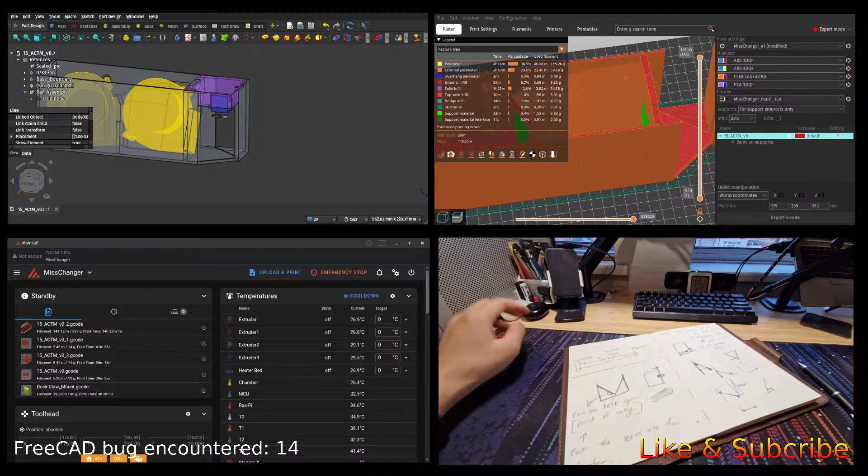Nonetheless, let me plug this in here. Let's see if this thing is gonna change the game in terms of the audio. Is it working? I think it's working, right? Yeah. All right. Ooh, hello. Drop frame coming in.

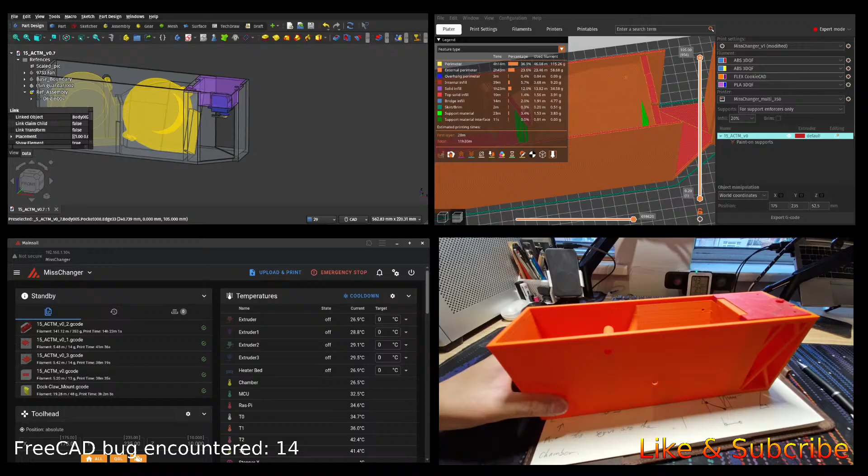Let's recap really quick what we did yesterday. So, what we made here yesterday was an updated version of this thing here. And this is a kit that I built for my Voron 3D printer. Now, it looked great with a bit of stringing here, but the one thing that I pick out of this is definitely I had used too much filament. Too much material is being used to make up this wall and the base.

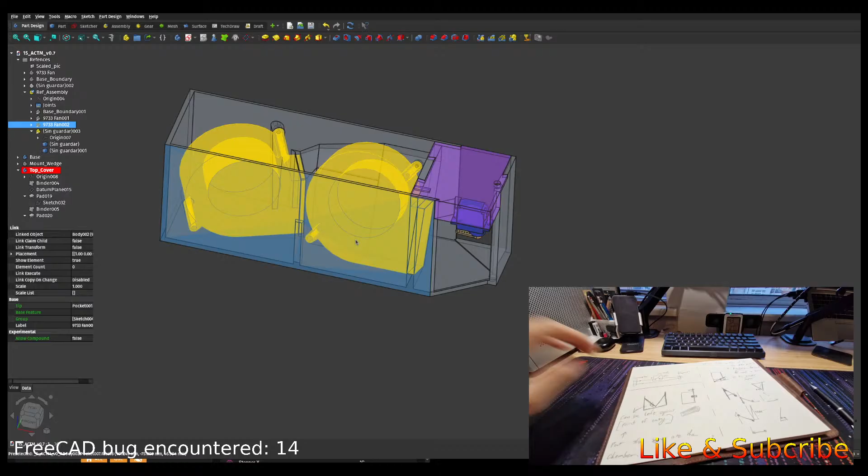So what I decided to do in this new version of the CAD is to reduce the size of the wall and actually make this giant cutout as well to make room for a servo motor to sit there. However, since yesterday I had a bit of second thought, you may call it, on the thickness of these walls still, as well as the existence of this servo motor.

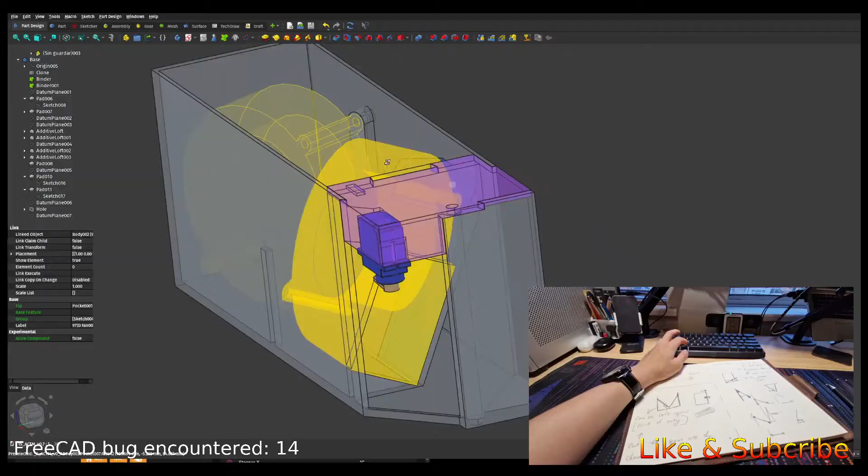So first and foremost, it's not the wall on the side here that I'm gonna be changing today. I'm gonna change the thickness of this 3mm wall in the center. So originally the idea behind that one was that it's meant to mount the fan. It was meant to hold the fan in place. And well, it felt like a good idea at the time. But now I realize if I were to screw in from this side here, there's a pillar right there.

Yeah, hey Dukin, how you doing? Yes, don't get used to a Tuesday stream. I'm literally doing this because I just found a way to stream on Twitch as well, and I go like, oh, I can do that, and here I am, testing it out. Taking it for a spin for a couple hours.

Anyway, yeah. So now this thing exists now, this screw-on bit. So if we put on the view, oh my god, it doesn't show it. Flip it. There we go. Didn't change anything. Oh, no. Transparency. Sorry, that was the wrong button.

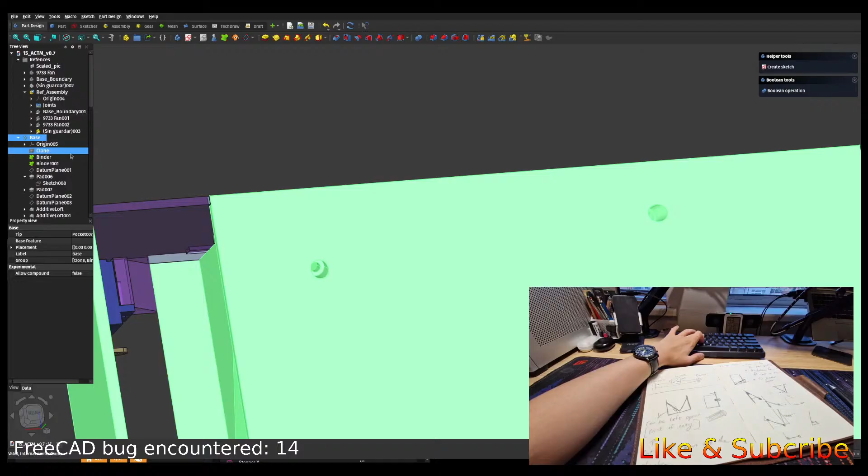Yeah. So now that we screw things on from this side, I realized that this little pillar right there will make up the 3mm needed to hold the thing in place. So I don't need the whole flap to be 3mm anymore. So that thickness there can now be reduced. So let's do that. Save us some more material.

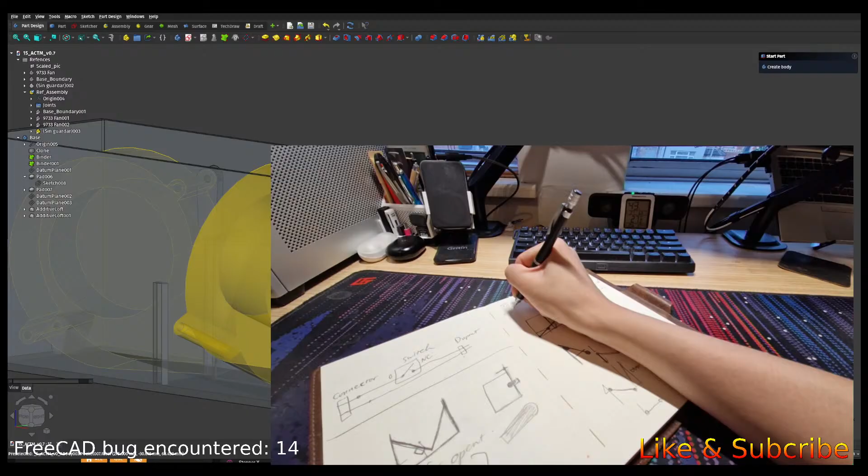Second of all, and this is the thing that I have been doodling on my notebook here, is some thought on how to do this fully mechanical. That's something I kind of want to do, but I know for a fact that it's not the most efficient way to do so. It's more of a cool factor of a fully mechanical flap opener. I may want to make the flap first, huh? Yeah, actually, let me put the note here, make the flap. Yeah, I think I'm gonna call it the flap from now on.

So here. There should be a flap door here that directs the air coming out of this blower fan either inward through these triangles here into the chamber, or through this door at the back here, on the side, to the outside. That's the idea. So right now, the defeatist part of me, and honestly the pragmatist in me, wants to use the servo motor to actuate that door.

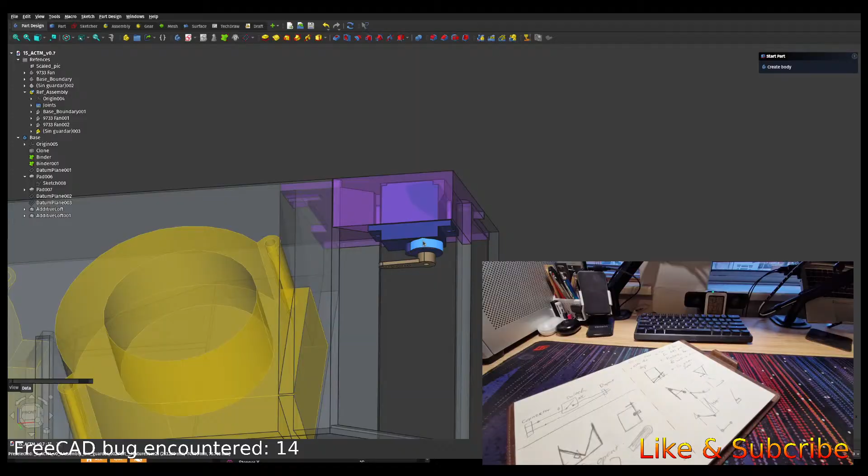It is the simplest way to do so if you're fine with playing with electronics, because it's not that hard. As long as you know how to plug this servo into a GPIO pin on the Raspberry Pi, everything else is gonna work just fine. Nevertheless, I'm still a little partial to mechanical mechanisms, so I will do one final attempt today to figure out if I can actually make it mechanically toggleable.

Got some ideas, sketching down. Honestly, I got more on this. No, I filled out an entire notebook with those sketches now. "You've been struggling with the Pico MMU for several days. I gave up and threw it in the trash. I'm eager to await the new version of MissChanger." Yep.

Yeah. Once you get past the single nozzle system, things get difficult, huh? Honestly, the more I look at the old version of MissChanger, the V1, the less I am happy with it. Documentation and all. There's so many things I could have done better back in the day. Mostly internal tolerance, to be honest.

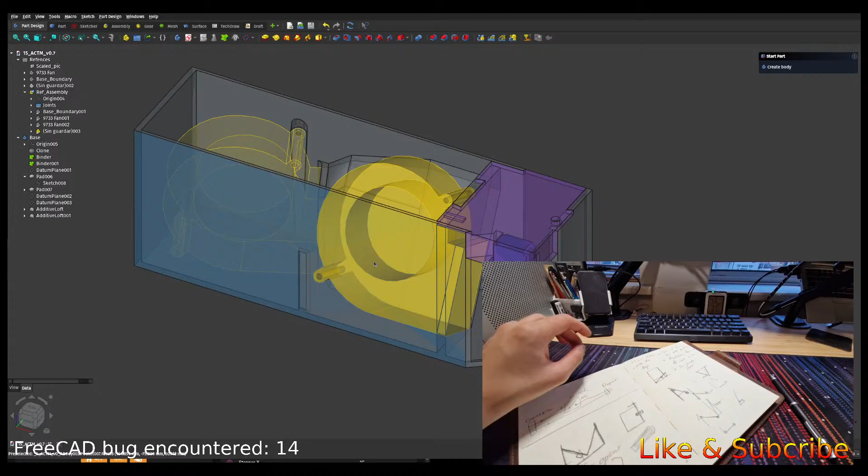But yeah, things get complicated quick when we deal with this kind of thing. The setup guide for MissChanger V1 is 29 pages on top of the 60-something pages for the mechanical assembly. So the complexity just increases exponentially when you go to a tool changer. Not too sure how I felt about that.

But yeah, that is one more thing. Maybe that's a good thing for the hardware assembly. I could put everything into a single file instead of having two files, one of them being a pure wall of text. Yeah, no. Let's do things one at a time. Let's trim the funnel wall. I don't know why I wrote it like that. Here you go.

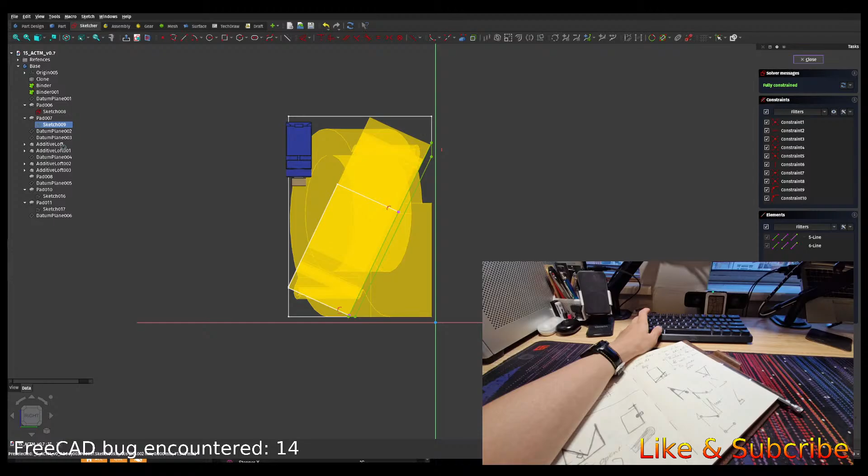Set the thing in the middle there. Reduce the funnel wall to 2 mil. So I did everything, I believe I built it. Why is this not giving me anything? Oh, right, because I built it on top. 2 mil. Put one down, and that's it. It should reduce everything to 2 millimeters. Nothing else breaks. Wow, I'm good at this. Okay.

Wait, did you guys hear that? I think you didn't. I was coughing for a sec.

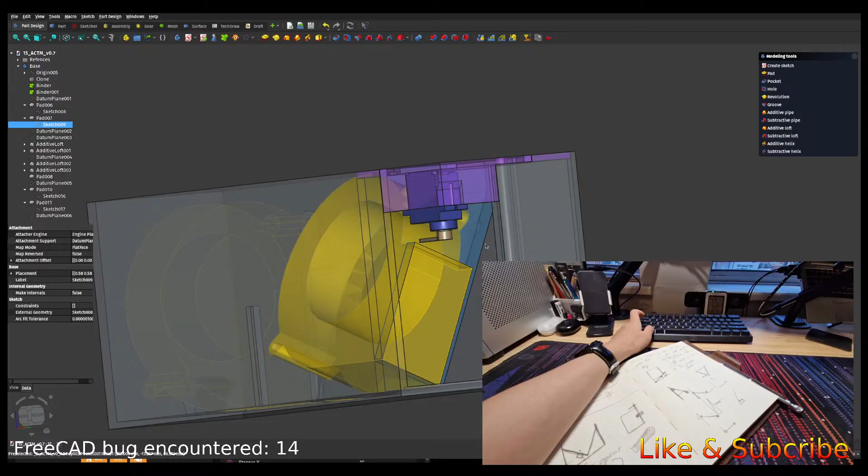Alright, so I'll just save that. That was an easy save. So how would we go about making the flappy doodles on this thing? Make this bigger now. I reckon about that much is better. So I can move this over here and still see the door coming in. Okay, and some doodle here.

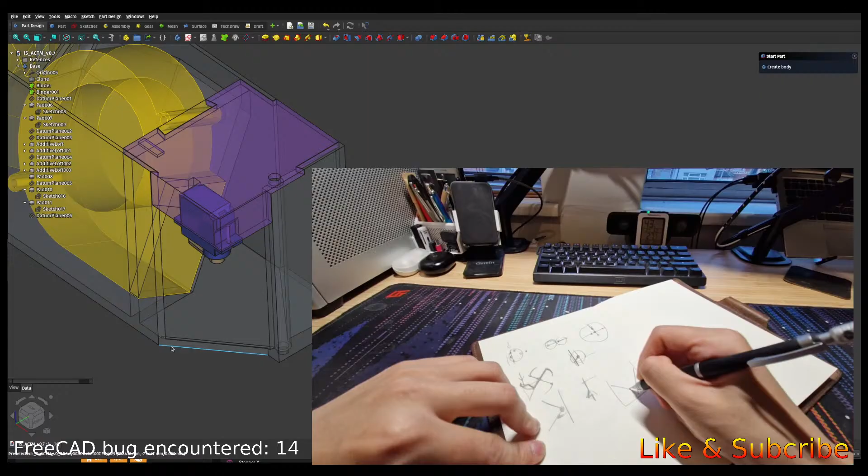If you look at the top-down view of this system, the corners don't exist, but this is what it looks like. This is the groove that the flap needs to fly in, between that and that, right? So there should be a distance here. To help with all the thinking, let's just start on the sketch. Let's start making the flap. This can go. This can go as well.

Okay, that's the guy running a motorbike outside our door. Don't worry about it, happens every day. Pretty cool though.

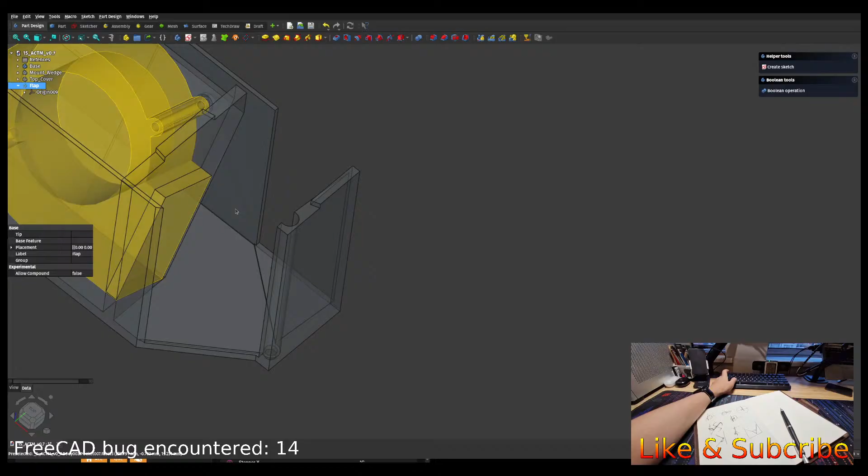So this is the flap part. And for it I will need the base. So the base now. Okay. Base. Put it up by 0.2 to make some room. Not in that direction yet. 2. Draw it, grab that hole, and start making some arches. Okay, create that.

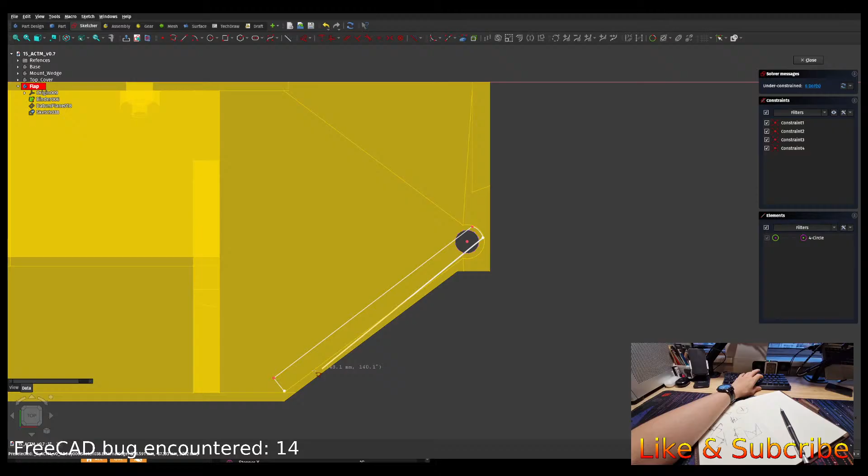Oh, come on. Oh no. Yeah, they have the modes. They have the tangent mode first, and then the normal mode. We want that freestyle mode. Press it three times, two times, like that. Oh, and I definitely do need that line. Just cut away so that I can see the line I just selected. The parallel, and put that down like so. Give that one a dimension as well.

Now I'm gonna use the diameter because that's what I know, which is not correct. Did I increase it last time? I didn't, did I? Okay, it was 8, so I wanted 7.4? Put 3. Yeah, 7.3, that's still right. I make that distance 0.2.

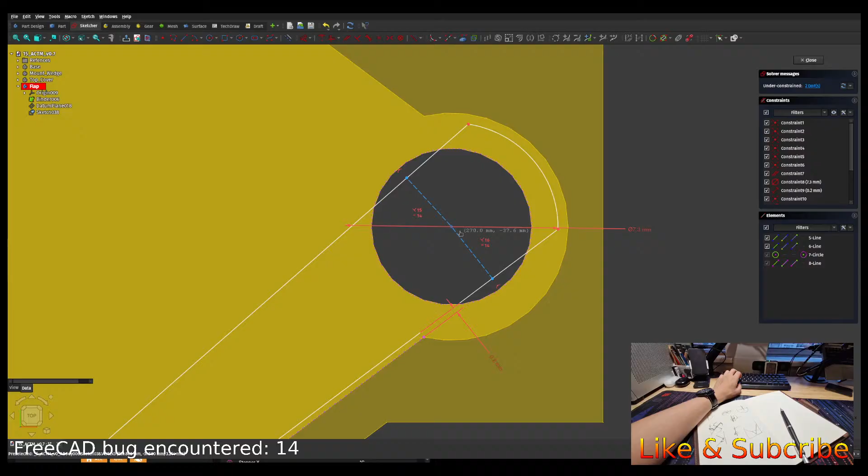And of course, to make sure that this thing is centered, put that there. I think people who have been watching for a while probably got bored of me doing exactly this several times already. But it bears noting, you can never get your CAD correct the first time, or most of the time. So you just have to do it again and again until you run out of options. You run into the best option you can.

Something is off about this gap here. It's not 7.3, it's 7.7 because it's 8 minus 0.3. Yeah, like that. So that gap now looks a lot closer. So now I look at that and I go, that's not a good gap to have. So we're gonna do 0.6. But that gap is now 0.2. Okay. With that, I say we can still do that. Okay.

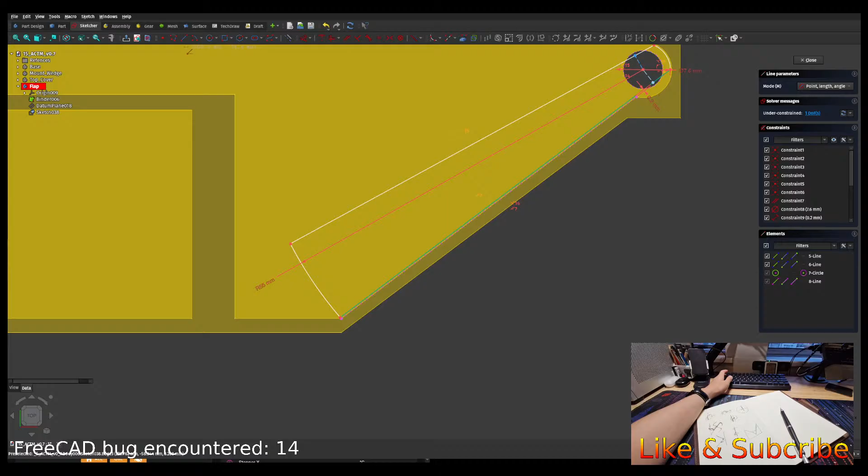Do we have a midpoint here? We don't. How do we get that? I don't want to draw a line across. Oh wait, now what we can do, except that's not the point. The reason is we want this distance here to be 1. Well, let's make it 0.8. You know, we're on a tear to make everything thinner. So just 0.8. So that's our flappy doodles.

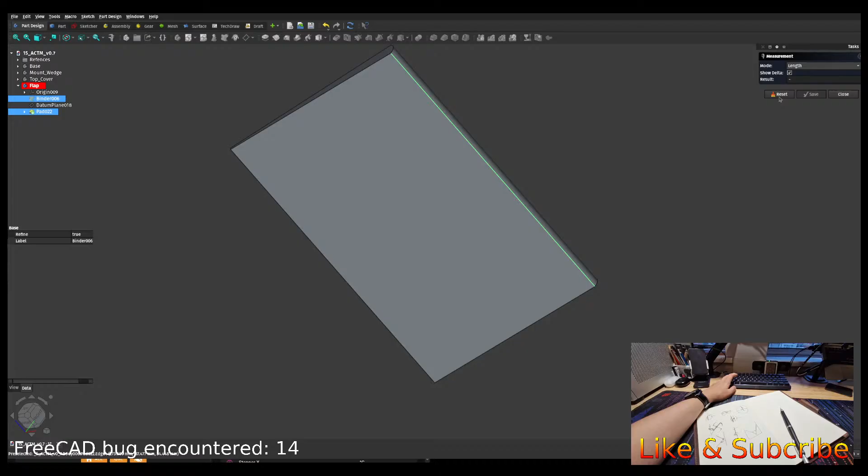Just extrude it. Now up to face. Assuming this face did not get changed. Oh right, this face will get changed when I add more features onto the base here. So let's not pull the face up, but rather let's hide this for now. I want to know this distance here. Nope. Okay, we're doing the normal distance thing. Yeah, 98.8 minus 0.2 is 98.6. So let's extrude that exact number and set up the face. That way it doesn't break too easily when we actually do make some changes.

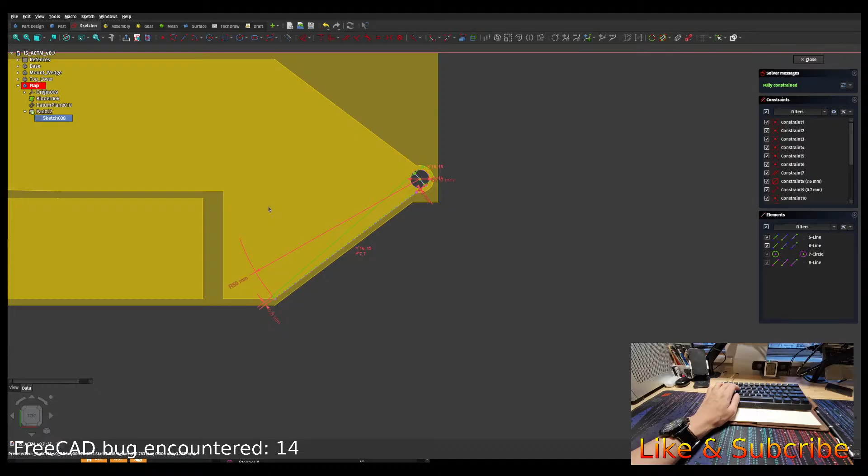Okay, and I immediately regret my decision. The flap, I should have made it such that it touched that wall, because that is more important. So delete the parallel function there. Do this without breaking it. Oh, there's this one too. So, okay. Okay, give it a distance of 0.2.

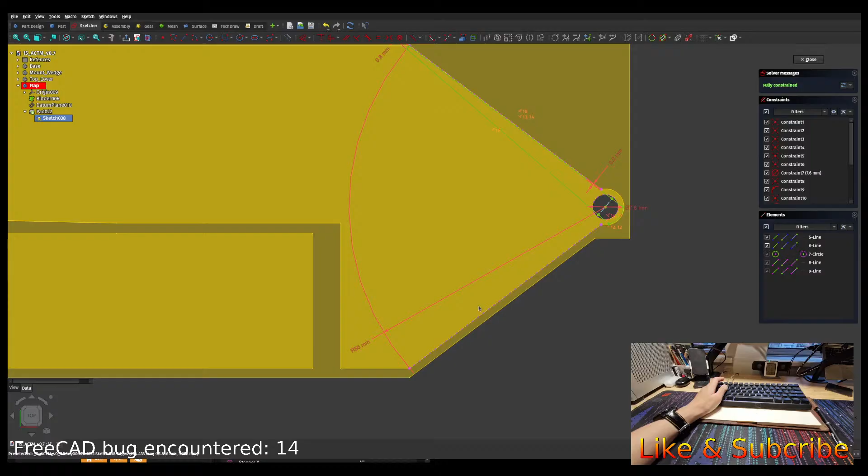Yeah, because this is the face relevant to that line there. It's the face I'm gonna lay under the bed, so I don't want anything to build in that area of the flap. That's why I'm gonna put it in this orientation. So when I build the other item, I can build it into this side here. Close that. Put this one back on. Give this one a different color so I can actually see it. Oh, that's the flap in use.

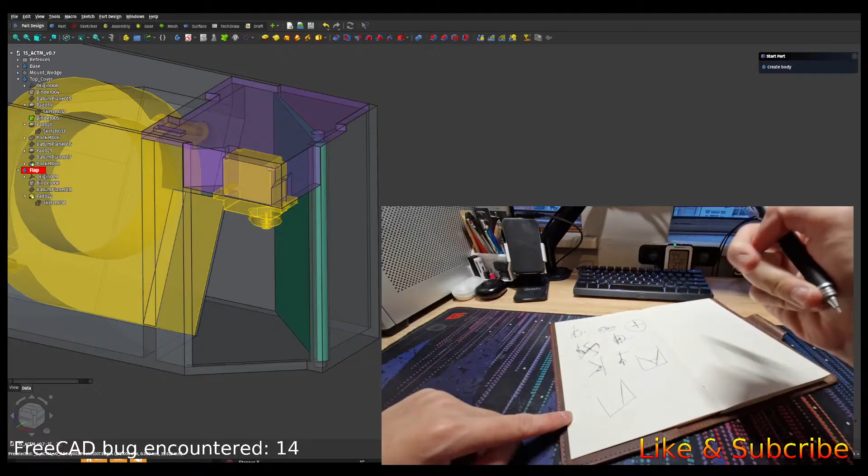Look at that. So if you imagine this from the top down, it's gonna look like this right now, right? With a U-turn and then a flip left. So we add a pin here so that we can pivot around it. That's one. We can add an arm coming out. I need a mechanism to twist this arm, to push the arm in and out. The servo can do that very easily because the servo can go both ways. But for a purely mechanical mechanism, you'll need to have a source of the pushing.

And for this kind of design, I say the most appropriate motor to push things around is the stepper motor for the Z-axis, the front right actually. There's three motors in a Voron Trident. I reckon if we put the gate here near that door, if we can somehow link the motion together, this motor at the corner here can actually easily toggle this switch.

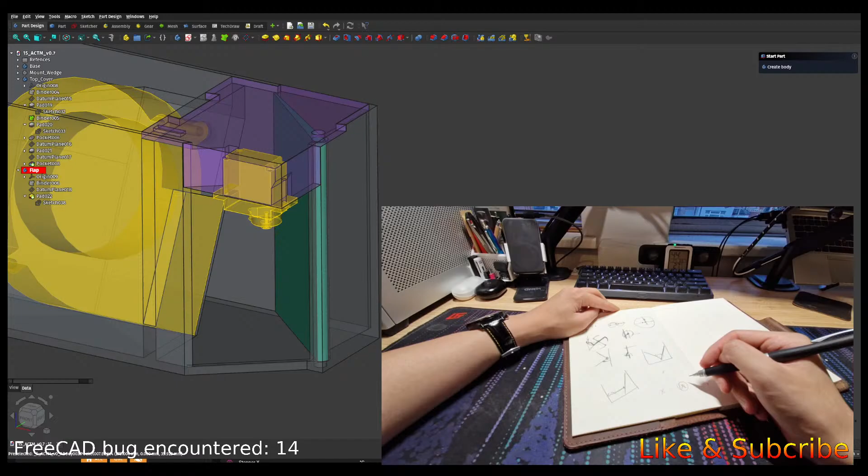But the problem is it travels up and down the length of the printer for like 250 mil. And this thing here only goes in and out like 10 mil or so. Right? So how the hell are we squaring that circle? Let me draw these extra lines here, just so that we can see this clearly.

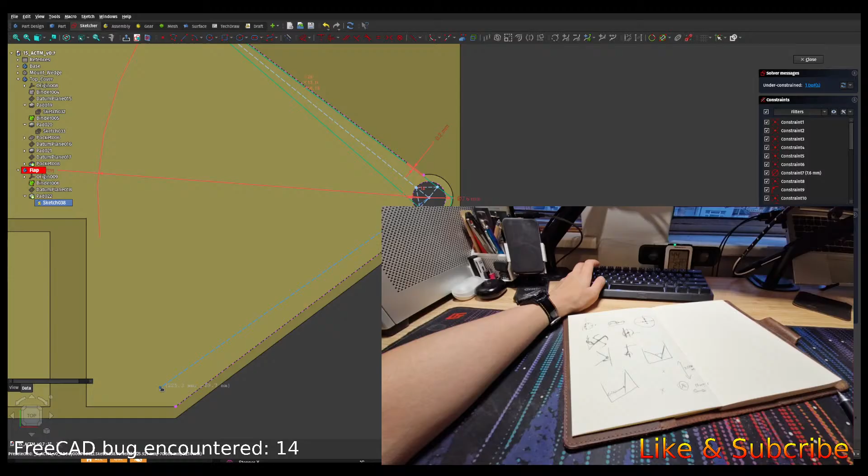This one is vertical, that one is as well. Right, so this goes there. This goes there. What's that? Equal, yeah. And up there. So we can make them exactly where they're supposed to be to make them vertical. Like that. That angle there is about 89, nearly 90 degrees basically.

And we draw a line here. So if we have a pin toggling around, the two extremes will be at the peak of those two lines there. It is vertical, and this line will have the diameter of that. Set diameter. We also want to know this distance here. Okay. Once again, now as a solid one. Rotate around.

Finally, this thing here is the arc to which it's gonna travel. This arc doesn't mean much at all because when we have a 4-bar linkage mechanism, it will just sort itself out in terms of how hard it pushes and pulls.

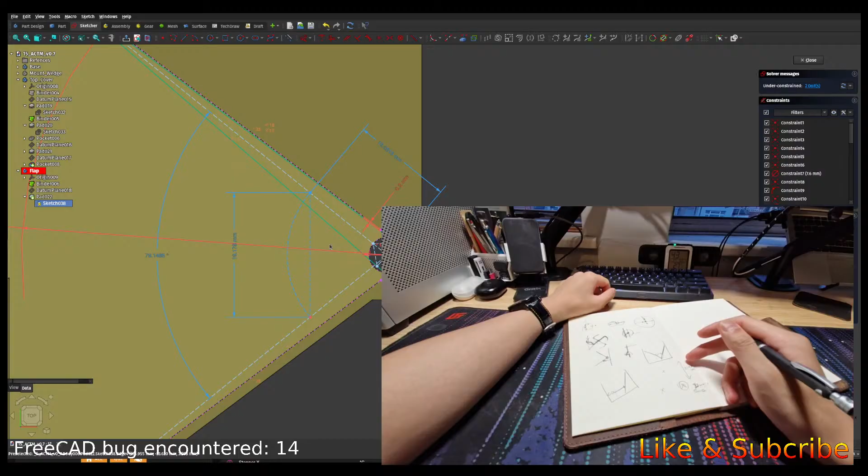So we will look at this thing from the side. So this is the doodle, right? That's the point on the thing itself. We want it to go from there to there. This is 20 millimeter. So what I'm thinking is a sort of like a Scotch yoke, or just a wheel with a pin in it.

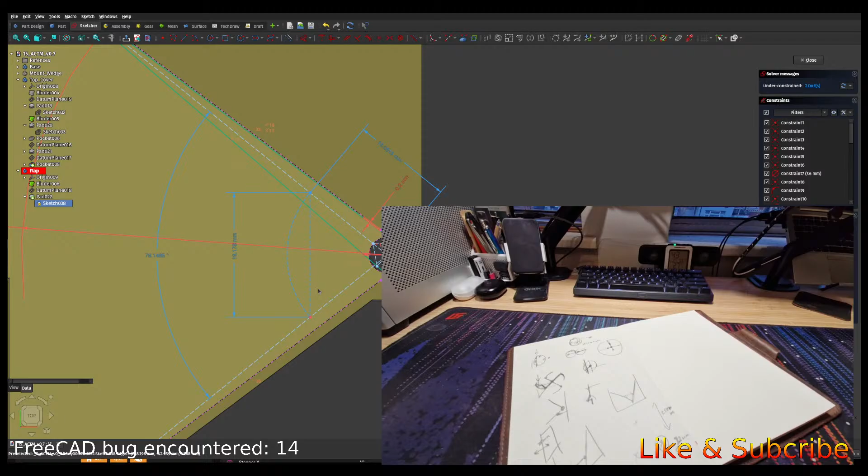Yeah, spin around, and obviously the two extremes will need to be 20 millimeter apart. 20 millimeter apart. That way, when it reaches one end, it will touch it. Okay, now we're turning the wheel though. Are we turning in a single direction, or are we turning it in multiple directions? Think about what the thing is.

So this is the rod that we're pushing in and out. Yeah, this is the paddle, the wheel. If we want to spin it this way with some sort of latch, have a handlebar, right? Yeah, with like some sort of pusher on it to push it 90 degrees, like that. You need to basically imagine it starting here. No, if it starts here, it will end here. Yeah, that's not too difficult.

See? Like that. So imagine this is the path of the thing coming in to push on this whole bar. If it wants to make a 90-degree turn like that, it'll catch like a latch thing. So something like that. At that point, it will release itself at this point here, where this will be released off this. If this point here touches that one, it'll go there and it just slips out of the way. Right. So let's say... it's actually impossible, huh?

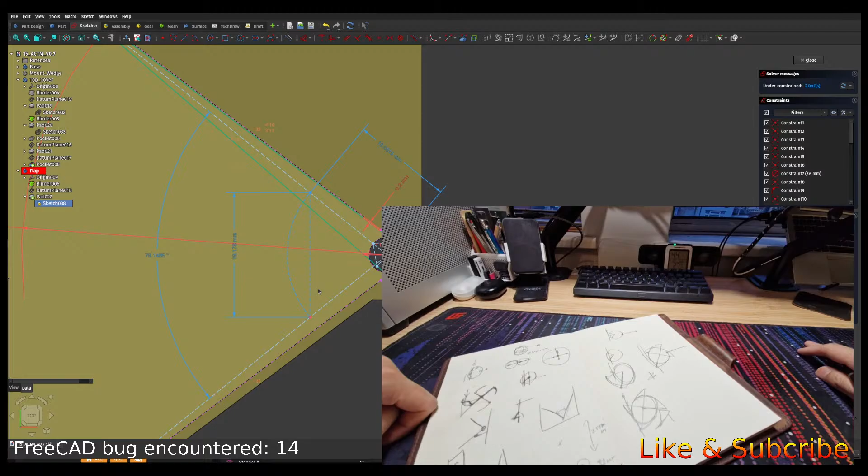We don't actually need to worry too much, but obviously we need to know where it is rotation-wise, but that would be easy because there are only 4 positions, only 4 steps per revolution. So we can install a switch on this corner here to detect when the flap is in that position, and when it's in that position, it is 2 steps away from fully closed and 1 step away from fully open. If that makes sense.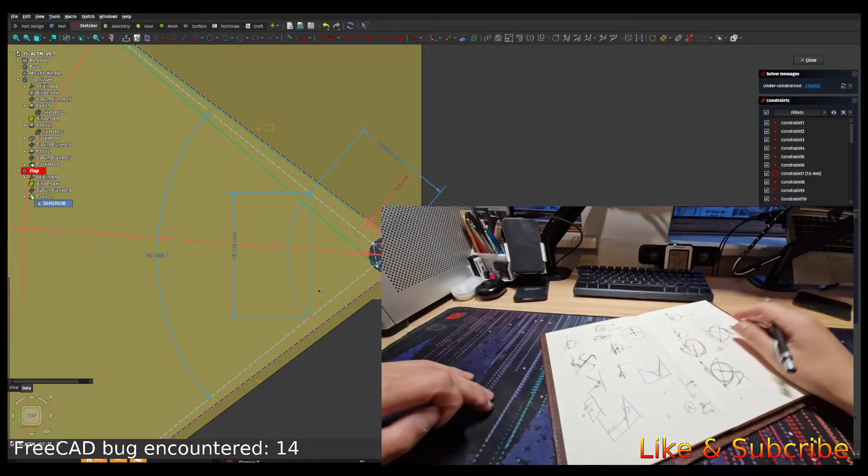So with that in mind, the next thing is to figure it out. I'm reasonably happy with that, I think, unless there is something down here that can cause us to be derailed. Let me do some measurement now. Okay, 20. I think I'm gonna lock that in for now.

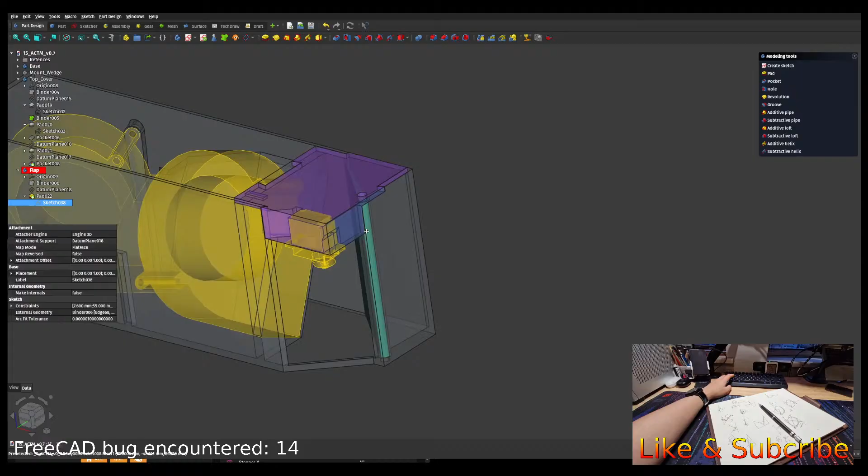So I want this distance to be 20, but how much in terms of space for the wheel do we have? Because this mechanism here, as you can see on my screen, this spinny doodad here requires a wheel to spin around, and that wheel needs some blades attached to it, so it might need more space than we actually have.

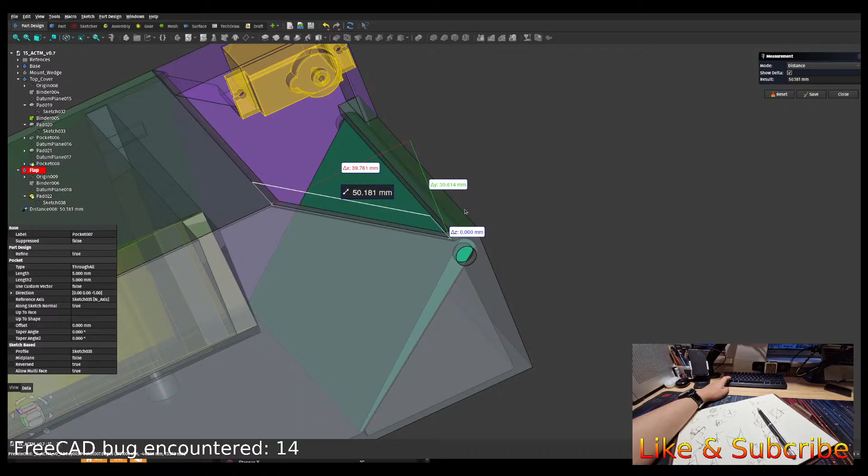We can reduce it a little bit, because the closer we are to the center of this flap, to this pivot point, that circle there, the less travel we need to actually actuate it. But there's a point of diminishing returns. How much space do we have to work with? 30 something. Okay, about 30 mil. Got 30 mil of space to work with.

So assuming that the circle in the center here, where the pin is going to rotate around, is 20. And let me do the wing here as 10. Okay. Can we even do that? Yep. So let's test that design first. There's no point thinking of how other things are involved before we know if this even works.

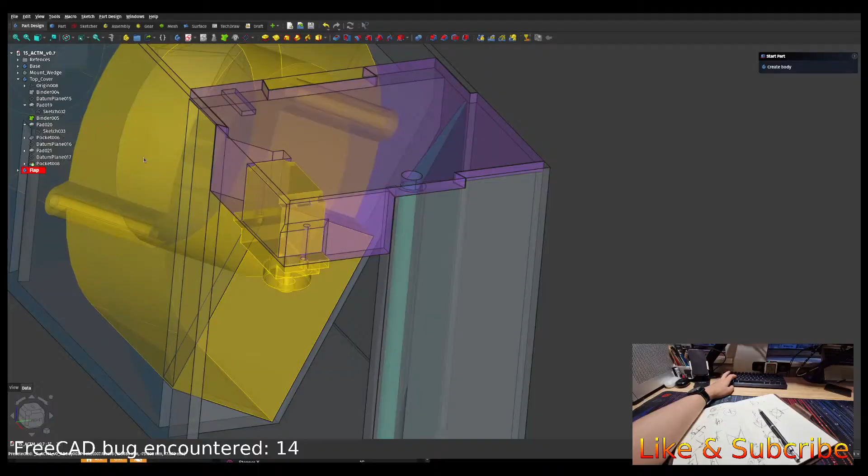And I think no matter what, I'm gonna build that item as a separate piece from the base body, because genuinely the motorized system here might be the most elegant way to do things, unless you want to avoid electronics like I am. So let's just hide that away, not get tempted by the easy way.

And I will create another body, because this one, let's say, is the wheel. Oh my god, I just touched something. We'll call this the turbine.

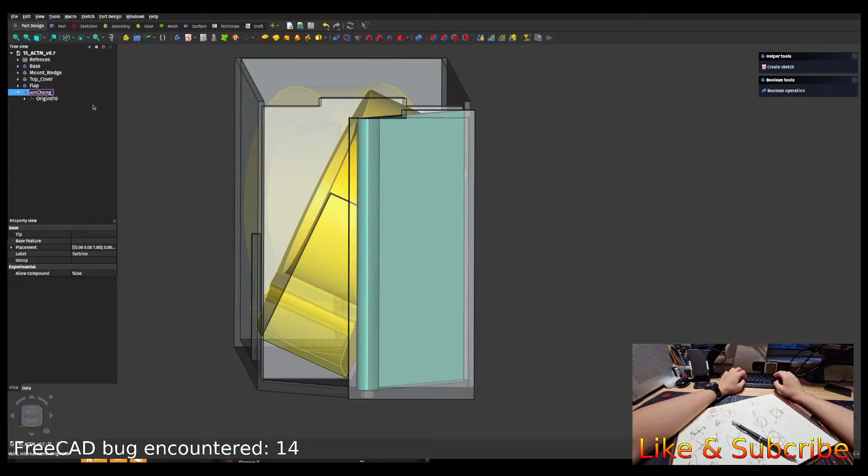God damn it, I know there's a Vietnamese word for it and I forgot. Very cool Vietnamese word for it. Chong chong. Yeah, they call it chong chong. Yeah, call it that.

There's a space in between. And for that, I need the base as a reference. Okay, I have the base now. And then I'll build something on this face.

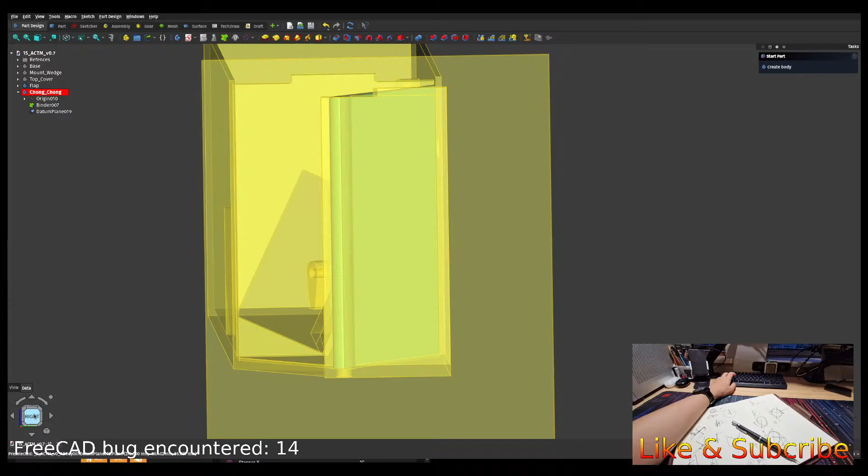Would you believe it? We're already 45 minutes in. 2 hours gonna fly by like a flash. I've barely done anything. I won't compromise at the 2-hour mark though. If anything, doing it like this would defeat the purpose of having a stream in the first place.

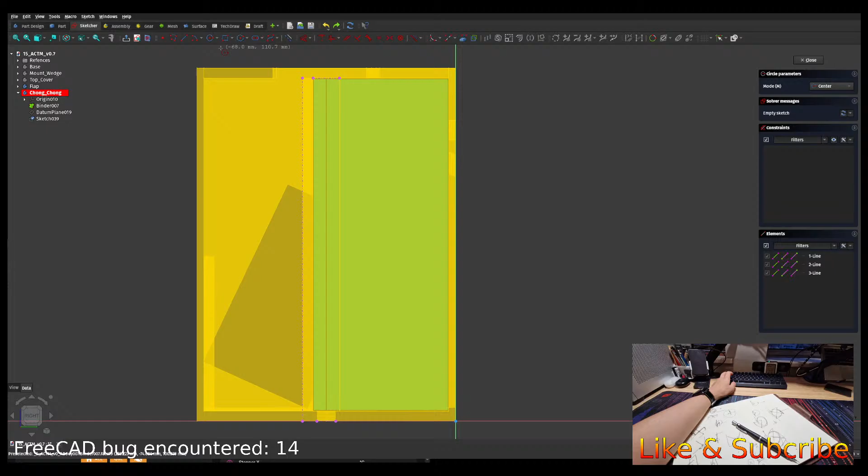Okay, so that line in the middle is just there to... no, what am I saying? I need to grab that line. That line is important. Hold on. Alright, just draw a circle. Make it 20, 20 for the center of the pin. Make a circle with a hole in the middle, and that hole is dimensionally 3 mil.

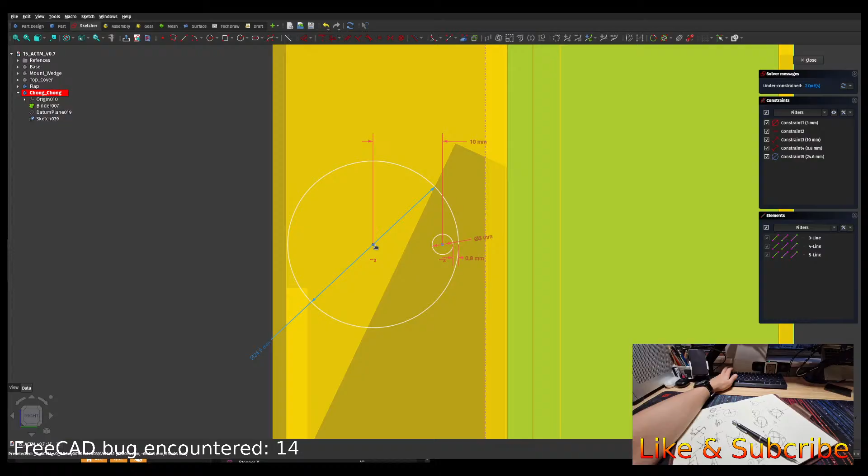Let's put it over here, because that's where the flap currently is, the extreme point on that side, and the distance between these two needs to be 10. Yep, like that. I say the dimension here is 0.8. So what diameter of this do I have now? And the position of this thing is not very relevant at the moment.

In fact, now that I look at this, we have a lot of space. Do we? Let's just try something before we make that kind of claim. Let's draw some random line there. So that one there is assuming the pivot of that face there. Oh no, we can pivot out further.

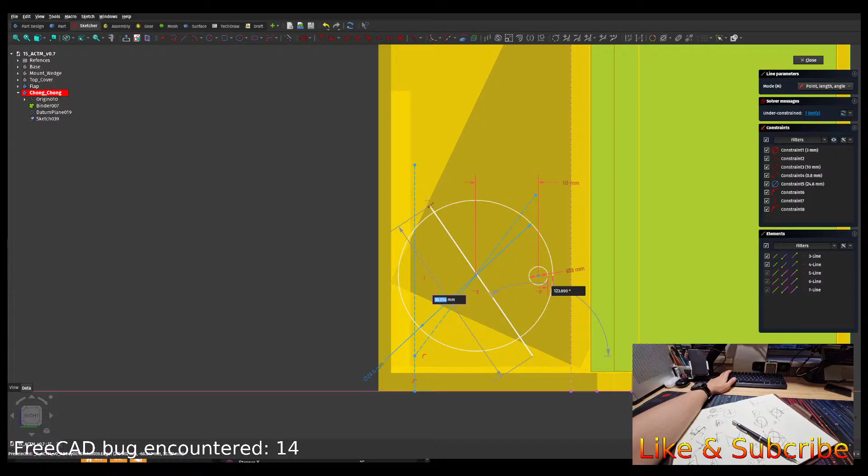So I'm just doing this for now. These two are symmetrical about that, likewise with these two symmetrical, and these two lines should be normal to each other and equal to each other. So I need to catch it, push it on the side there. Honestly, I don't need that 24.6. It's not a big deal just yet.

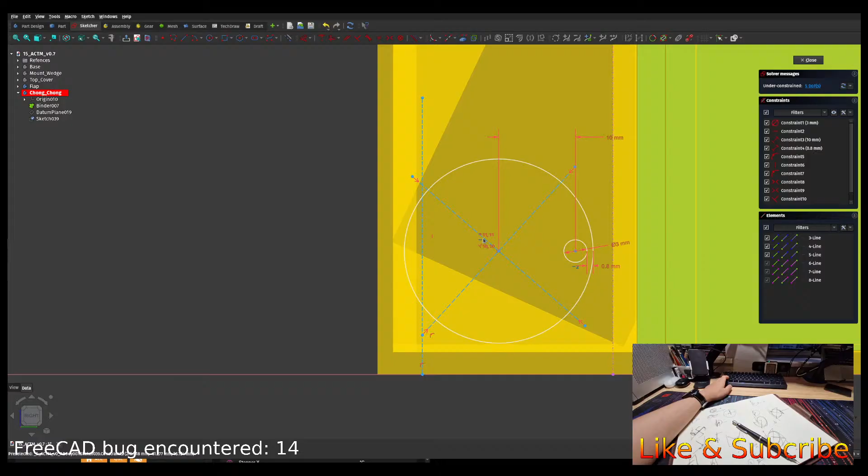So more room to work with than I imagined. Not gonna lie, I'm surprised. Anyway, let's draw some arcs. Oh wait, okay, that might not be the best idea. You see, because this line interferes into that volume there, we cannot have that.

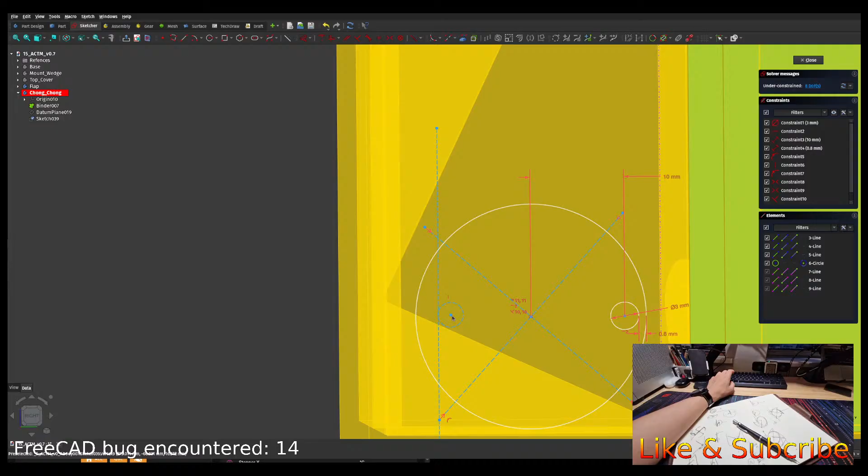Let's mirror this pin over here to that construction line. Because you can imagine this pin going near this pusher rod coming down. Oh no, this is not a push rod, this is the path of the push rod coming down. Would that be a bad one though? Well, not for the pin, I suppose.

But no matter what, this wheel that houses the wings needs to make room for this rod when it comes down, so the rod doesn't hit the circle. So for now let's just assume there's a way to make the rod and the pusher avoid that path.

Which is over here, maybe a little too. Okay, give this a dimension here. Give it 1 mil, like that. And that way, we can guarantee that it's gonna touch. Just put this here no matter which way. Symmetrical.

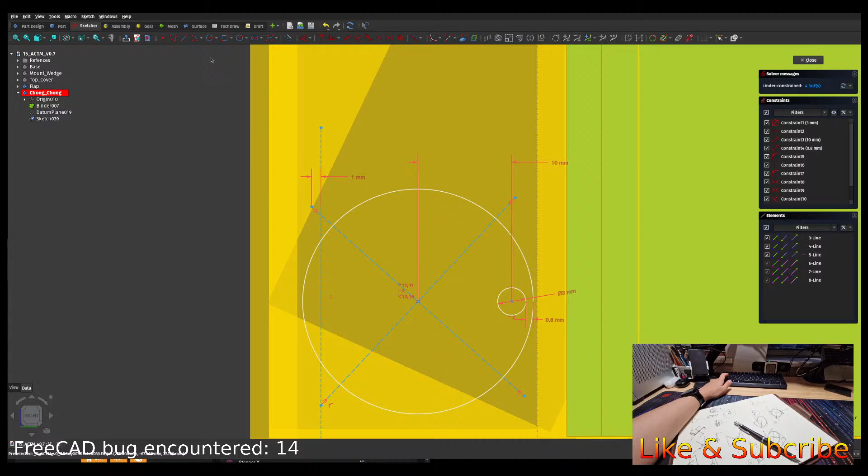Okay. I need to build a collapse inward. This is what I'm thinking. When this is being fully extended, that one needs to be collapsed inward. Maybe.

Oh, right. So let's draw a circle here, tangent to that, and that is what the whole thing needs to be able to exist within. That doesn't make sense. No, I'm not making sense. First of all, this wheel does not need to be on that face. It could be at an angle, and as long as it toggles the same pin, it should be fine.

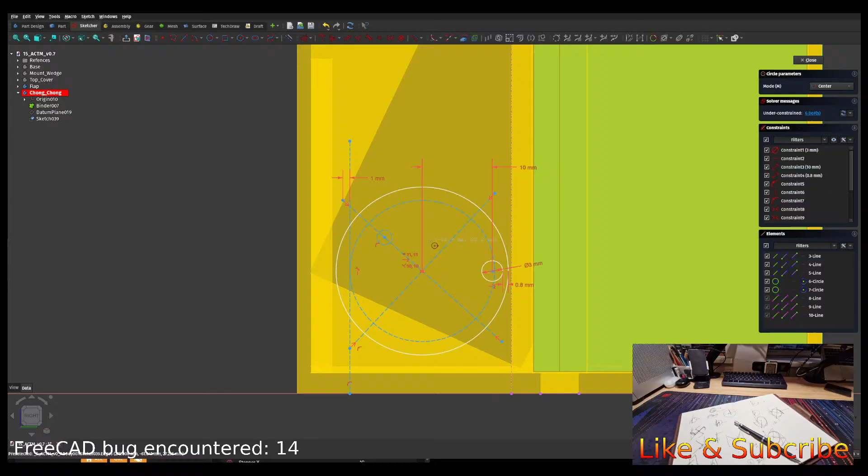Yeah, I think that's enough thinking. I'm blabbing on too much. I think I should start building that. I'm building stuff now because I think we have a winner.

Okay, I'll just set up a plane. Let's move it in a bit. I want to reserve this wall here, the thickness, I mean. Or maybe 4 or 5 mil. I think that's 4 mil, right? Yeah, maybe we'll keep the wall to be 3 mil. No? 5 mil at least, because of the threaded insert.

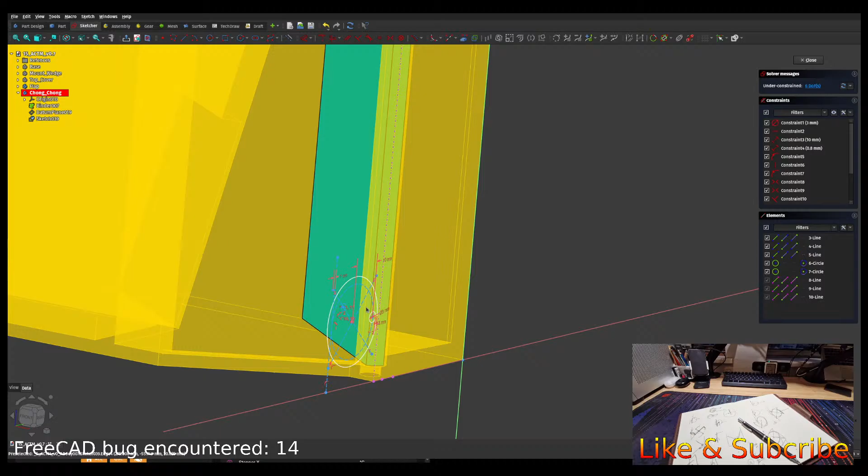Oh my god, I need to highlight it so I can see it at least. We push it in. No, wrong direction. 3. 3 is fine. Right now, make it 4. Make the wall 4, make the ring 4, and make the pivot point 4. Slightly thicker than the thickness of the pin, which is just an M3 bolt.

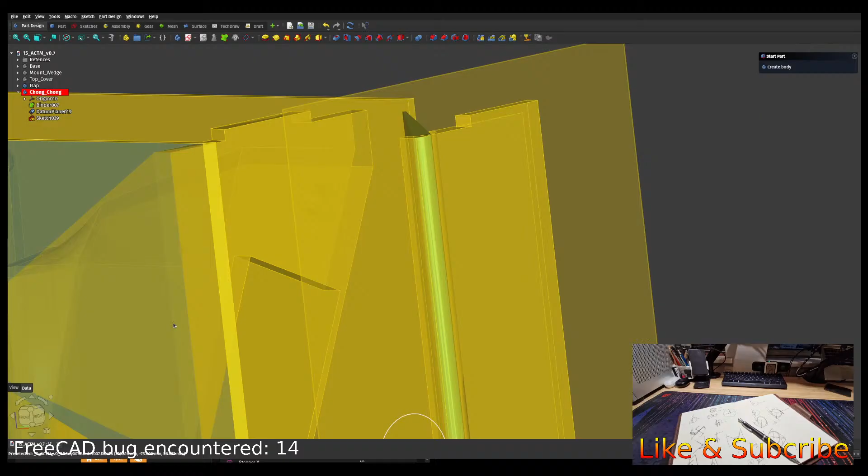As for the position of this thing, this will be intricate because we actually want it to be as low as possible, because the toggle is gonna come down here. If my understanding of a Trident is correct, the aluminium extrusion is gonna hit that bottom there. So let me draw the line up here. That should represent the height of the aluminium interaction with this. So make it 20, which is actually far higher up than I thought. Okay, that's good to know.

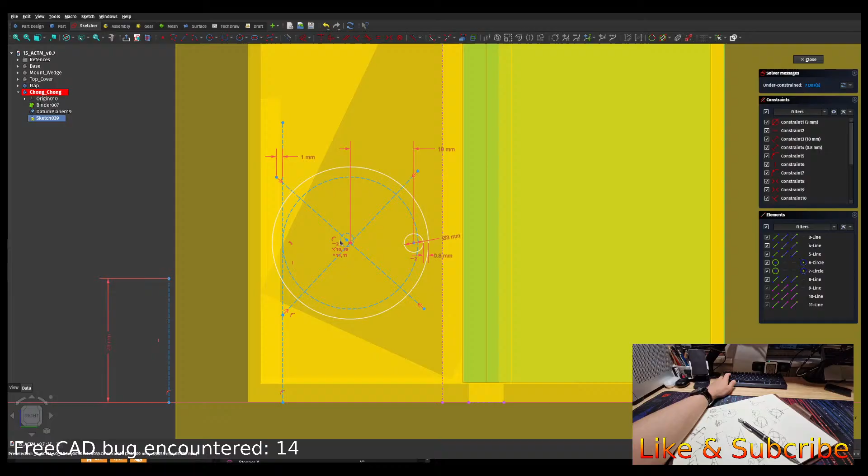This point, I decided I'm going to do this right now. Actually, a construction circle for this one as well. I don't think that matters too much. We can always just have it hit the wall and curve around. So as long as that point can collapse into that and down there, should be good.

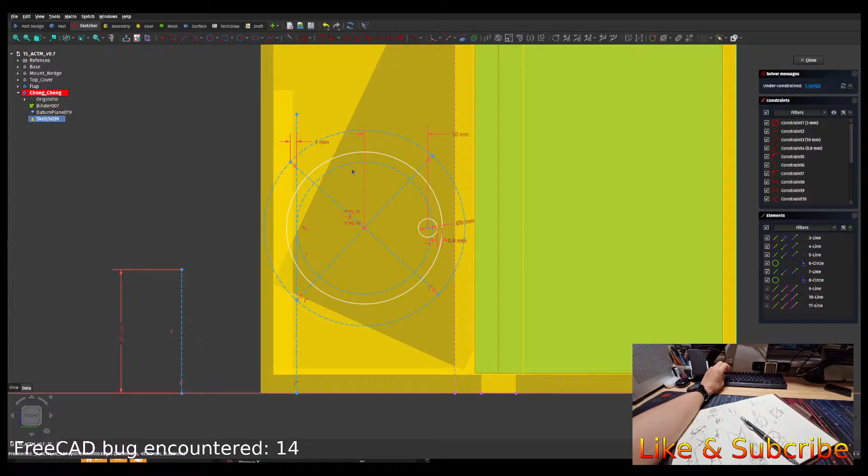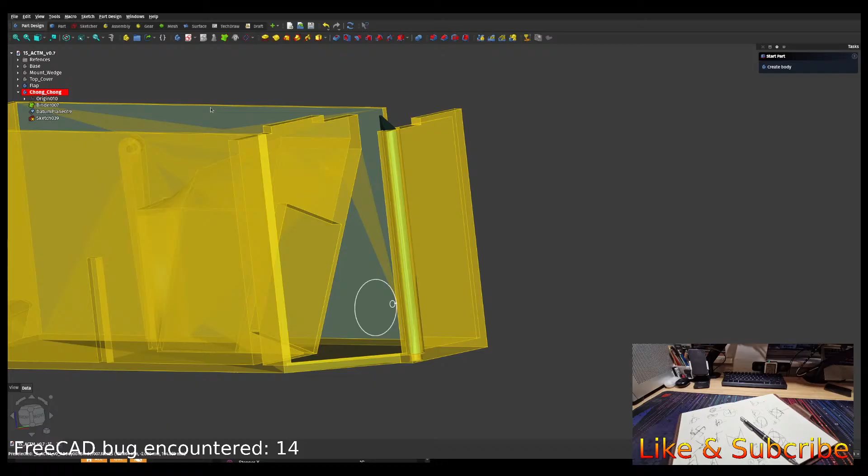Wait, it's not updated. Just make sure that the sketch is updated to where it's supposed to be. Yep, right there. Oh, wait. This needs to go deeper actually, because remember when I said make everything 4mm? Well, this ring that we are drawing actually needs to be 4mm more, because we need to make a 4mm thing for the wings of them.

I gotta think about it. I was thinking about making a lever arm here and have it toggle up and down to get this wheel turning. Now that I look at this, I can just attach something to the other side, to the aluminum extrusion that holds the bed up, and basically add a pin on the aluminum arm. It just drops down along with the gantry instead of me figuring out where the pin needs to be. Actually, not a bad idea, I would say.

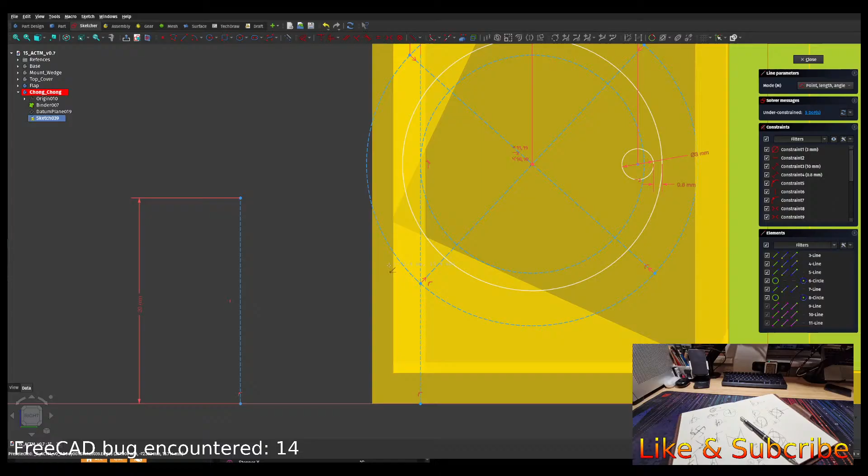I mean, how many times are we going to send the bed all the way to the max position? Right. And even if we do, turning off the fan during that time would be a good idea. Won't be too much of a problem if we turn off the fan at that point.

Horizontal. And this will also justify me leaving this whole groove open, so we'll have more space for the thing to go down. Okay, I got it. What's this? Why are you? What's this?

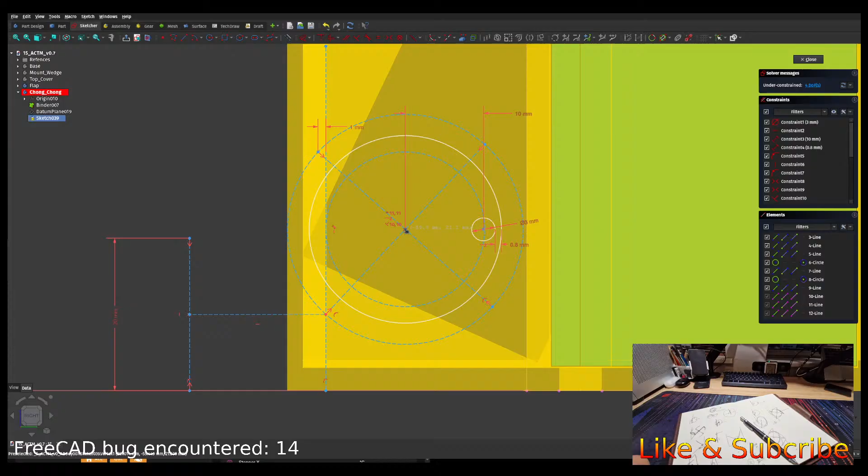We don't want it to swing outward, do we? It's not a strict requirement, but I'd rather this not access this space. Oops. T for tangent, sorry.

And since we are at this, make that one tangent as well. Oh, I'll restrict everything in the middle. Okay. And these two equal, so that we can lock the lid. Yeah, I'm happy with that. Full constraint? No, no, no. There's something. Oh, there's this one. Yeah, this one can be whatever. I say you get to be a cool 50 millimeter.

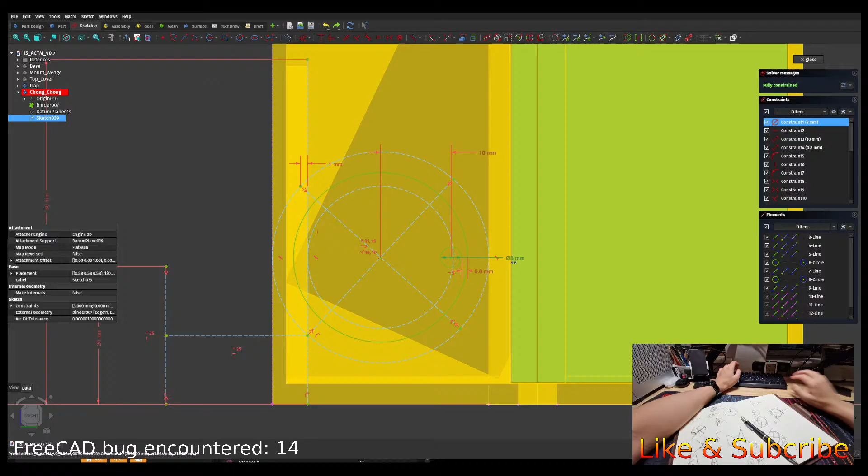Oh no, actually we can still make some more sketch here. So where do we want to pivot this pin around? This needs to pivot inward so that it... Oh no, that needs just slightly inward. Okay.

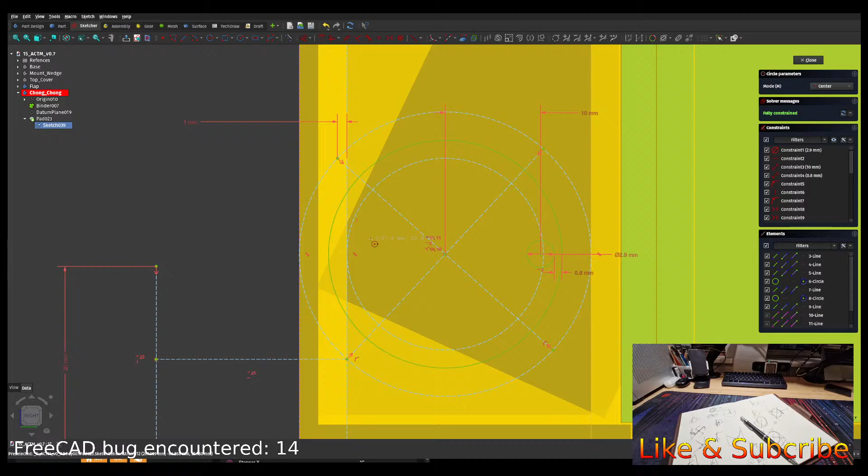Just realized if we turn it, this point is where the turning of the door is gonna happen. This point is 30 millimeter off the bed. That means we will lose 31 millimeter of print space if we do not want to touch this at all. Hmm. 31mm Z loss is a hefty number.

So what if we move this, instead of putting this in the center here, the 10 mil, I will put this all the way down, as down as possible. So this is now riding on the bottom edge. Okay. We got 25. Still quite a hefty loss. What are we doing about this? I just wrote in the documentation saying that we shouldn't access the last 25mm of the build volume in the Z direction. That's not a bad choice. What else was there?

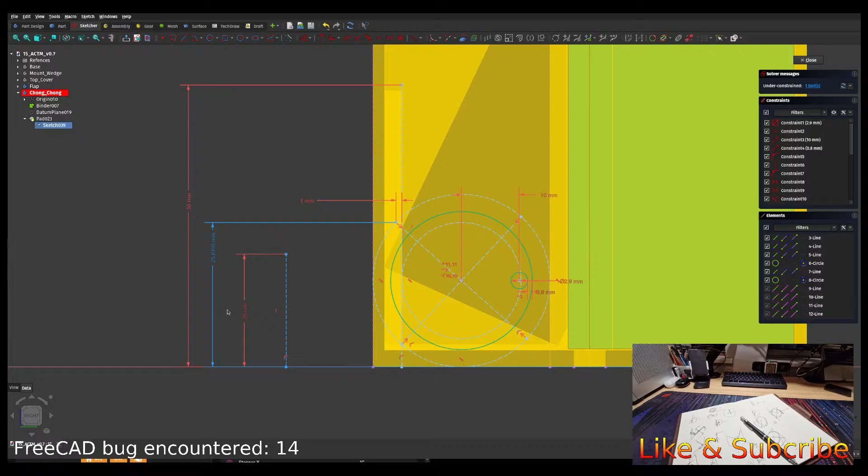There has to be a way to toggle it in and out. I mean, there is a way. The pin that's gonna hit that latch is on the Z axis. Is there a way we can adjust it at the beginning and then only let it go down afterward?

As in, obviously the pin that's gonna hit that is gonna be screwed into the Z axis via a, what is it called, T-nut, right? A spring-loaded T-nut. So if you guys know about spring-loaded T-nuts, I can just loosen it and move it left and right by hand. So moving it left and right is the easy part, but I wonder if there's a way we can do this via the printer instead of by hand.

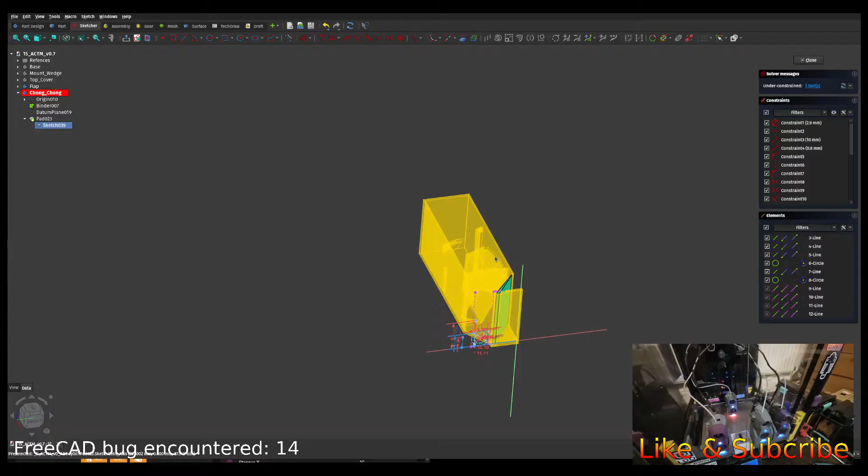Oh. Turn on the lights so that we can see. Oh, actually, I can use the Bluetooth headphones for this. Hopefully you guys can actually hear me.

Turn this really quick. Oh, I put the FreeCAD window back on.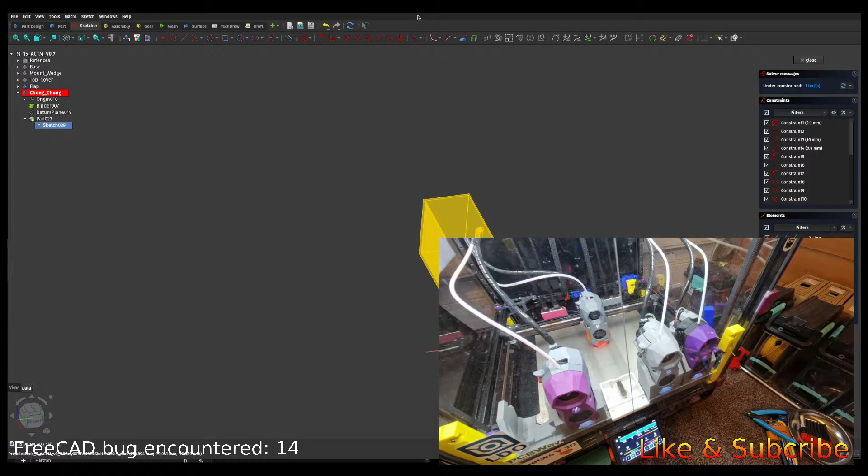So I'm thinking if we had some sort of mechanism up here, where we can depress, then engage and disengage this wheel from the toggling mechanism, right? And the thing that's gonna hit that, most likely.

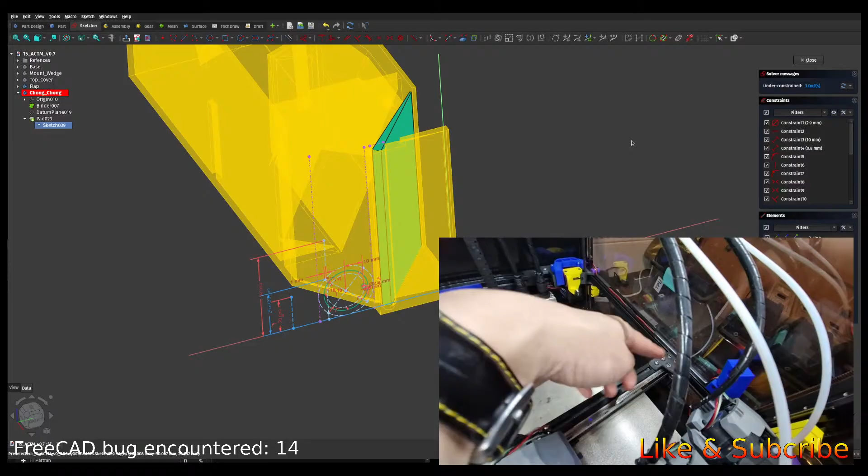Alright, I just switched to the Bluetooth mic, so I hope everyone can hear me. So the thing that most likely we can use to depress whatever that mechanism is, that toggle down, is this thing here. It's the bottom bit of the X gantry here. So go to that position, for example, and that would depress something down on the corner, push something down, and that something will engage the mechanism to allow the fan to be toggled.

But several problems arise when we think about that. The first one would be, what if the printer just happened to travel to that position in the y-axis and simultaneously in the right position of the z-axis.

I mean, if we were to turn this assembly all the way to the other side, like if we point it toward the back, this gap is gonna be within the area of the Y travel where the toolhead is not above the bed. So if you notice on your Voron, especially if you build it stock and you build it right, when the gantry is homed at position 0, 0 on X and Y, the nozzle actually is not above the bed itself. So that's the stock Voron experience.

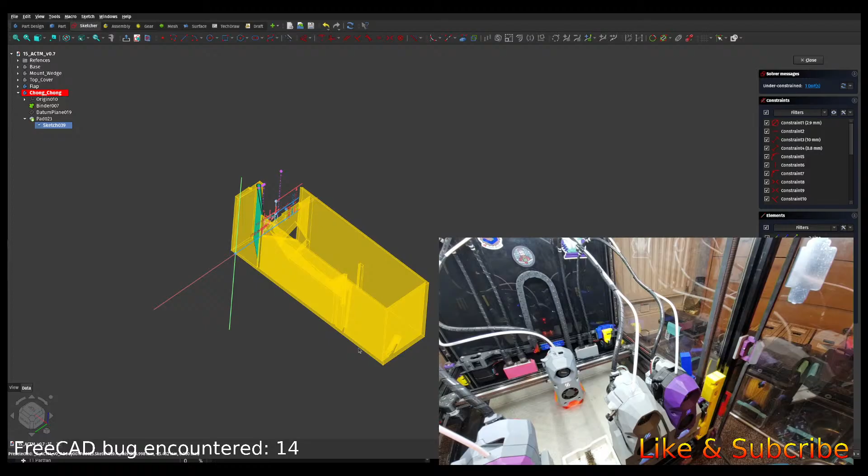And we can make use of that because in that position there's nothing to be worried about in terms of loss of Z or Y, because in a normal print we will never get out of the area of the bed. The downside, however, is that now we move away from the Z motor at the front, which is what's supposed to trigger this mechanism, and now we just turned it 180 around. So now we need to figure out another way to trigger this mechanism.

What to do? So it can come down with Z. Unless we want to deal with wire and string running on the outside. Yeah, so if we want some strings running on this side here, or maybe on this side here, to pull the toggle and turn the wheel, we can do that. It's not gonna look great, is it? But we can do that.

So just imagine this on this side, really. Just imagine everything got mirrored, and the wheel is now on this side. So the toggle that's gonna toggle the wheel is on this side now. So we need some sort of linkage, or a bar, moving up and down to that one. Would not be too difficult, I don't think.

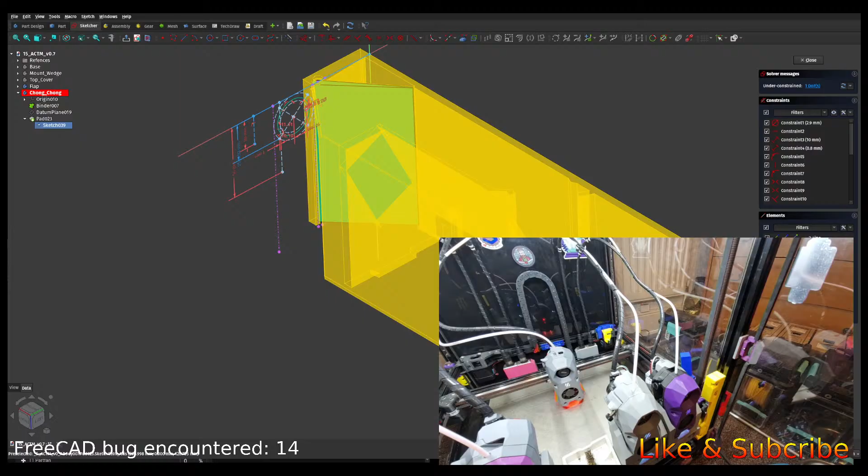It's down here, in fact. So I reckon we just have one of those, like, if you guys know the mechanism in a bin, right? Where there's a pivot here with an L clip, and a pivot here with an L clip. Those are connected via a metal wire, and because the metal wire is in tension, we don't have to worry about snapping. So maybe we can do something like that.

The downside, of course, is running a metal wire along the sides of your assembly. Maybe not a metal wire, maybe even a strand of filament, right? And of course you're gonna need to deal with the trouble of ratio.

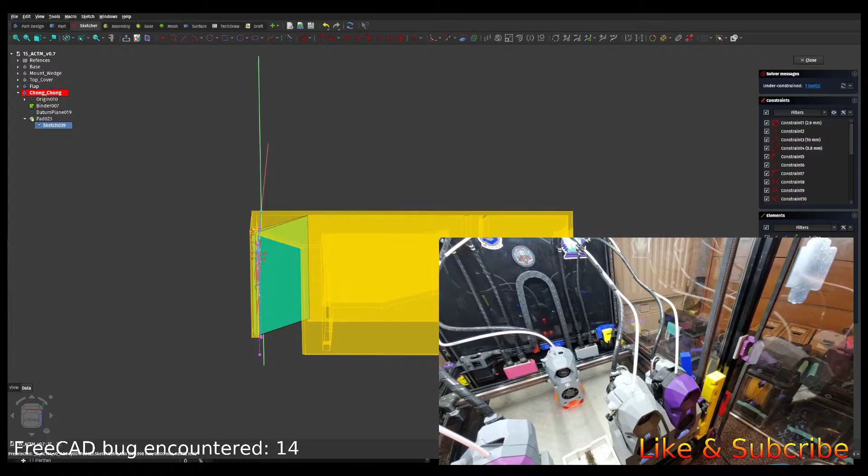How much trouble are we talking? Actually, yeah, this is it. Is this the distance it needs to travel? No, it's not. This distance here is the distance it actually needs to travel. So reference that. Okay, so 21, because I need to go downward by 21 millimeters. So roughly the thickness of 2020.

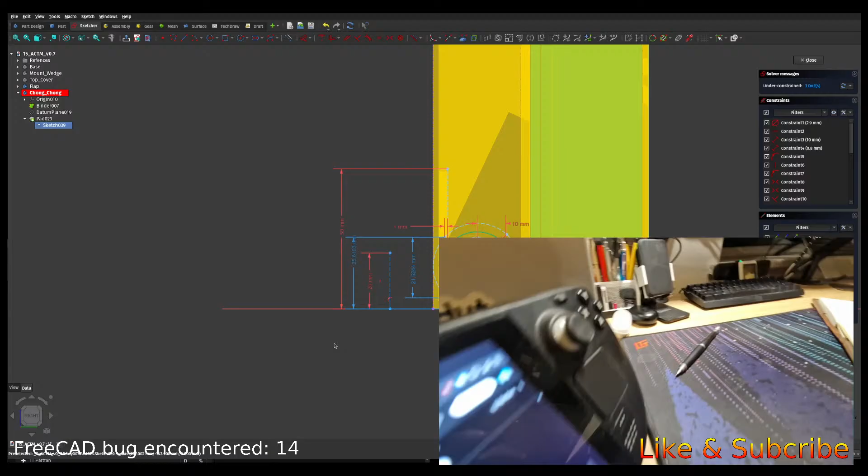So if we have an L clip, actually this is the time for pen and paper. So let's grab the camera, and if I can find my stand, that's it. So if we look at the 2020 profile, I have my 2020, right? So the length of travel is roughly about that much.

So if there is a pin poking out right there, if I just take a bolt and screw it into a T-nut on the 2020 there, and then have this down here, we need to travel a bit more than that. So if we did, that's about 10, 20, and we push this back. Oh, right, we can do the angle thing. So if we have a 20 circle there, that's what I'm talking about.

Alright, so the way a bin works is, if you see this little kick portion of the bin at the bottom, there's usually a little clip here connected to a metal wire. That metal wire goes down to another mechanism, something like that, and that's connected to another metal wire that pushes the lid up.

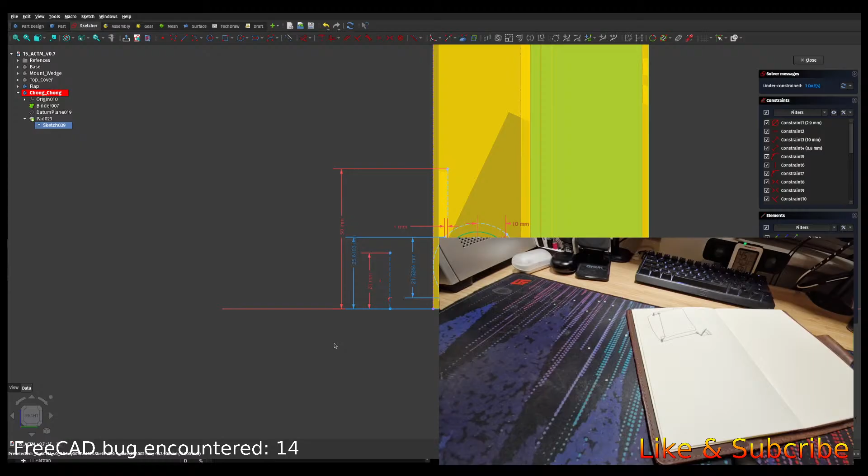We can leverage the same idea to what we are doing, because the 2020 is like that, right? So the pin is like that as well. So depending on how long this pin actually is, there's a circle, this arc, creating the arc of travel here. Yeah, the arc of travel. So I think that kickstand is going to be something like that. It's a pin which is going to rotate around. So there's going to be maybe a little thing over here.

Yeah, actually I'm just going to do this right there. Doesn't matter, I'll make it longer. You want to make it longer? Maybe not. It's some length here. Put it there. So when this goes all the way down, this goes there, flat basically, and that will go as well. And the angle of motion there, I will translate it to something at the back, and that's gonna allow the system to be toggled. Now we're doing that.

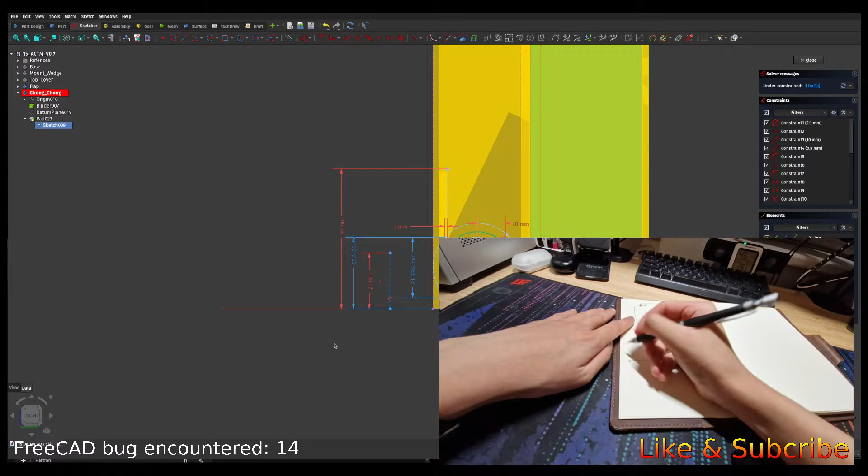I have a feeling that we are going to over-engineer this. This is fine, but if we can get away with it, put a servo and then press a button. Yeah, that was the conclusion I got with this. So, alright, just finish this thought, and then we're not gonna continue this. It's ridiculous. There are so many extra items and steps to assembly just to have a fully mechanical latch.

And ultimately, the fact is, a mechanical latch requires mechanical action, to capture mechanical motion somewhere in the system to move the flapper, and that is most likely gonna come from the motion system, i.e. the XYZ motion of the printer, and it may cause interference. Whatever I save in not having to run the 3 wires for the servo motor may just get converted into firmware trickery trying to avoid that specific point in space.

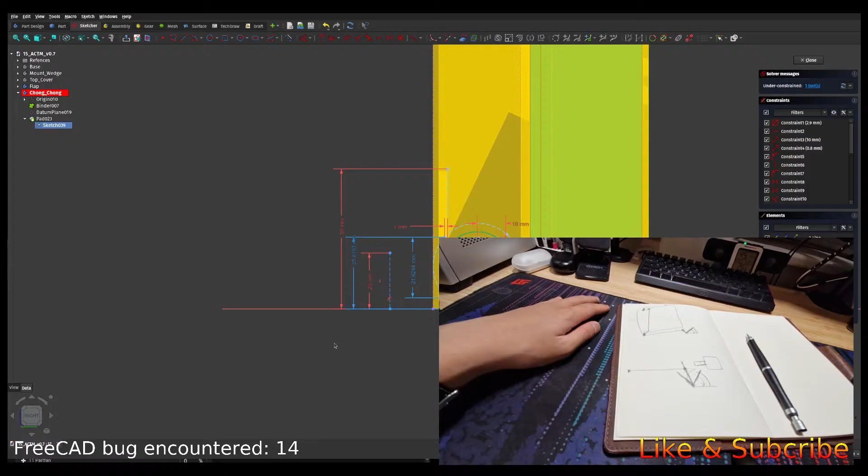So the complexity of the firmware trickery may just counteract the simplicity of a fully mechanical system. That's the conclusion I have there. You know what? Yeah. That's my reasoning for not pursuing this little side project any longer. That's going to be my reason for not pursuing this fully mechanical approach any longer.

Oh hey, we got a comment on Twitch. It turned out to be a bot though. How do I ban this bot? Hello? I can't ban him. Wait, how do I? I'll do it via my little console here. They got nuked in Twitch already, so I didn't need to do anything. All right.

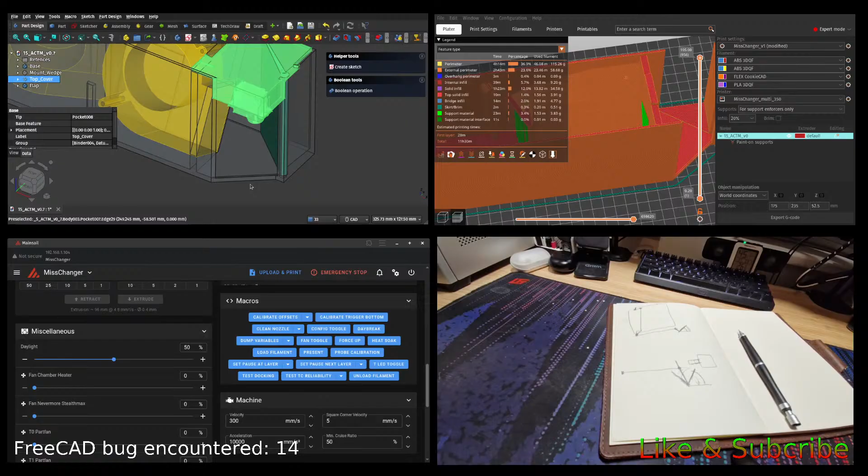What we have done today is go through a little side quest, trying to have a purely mechanical system to toggle the flapper on the active chamber temperature management system instead of this servo attached to the top of this base here. And I think I reached the same conclusion I did when I first started trying this last week, and that is ultimately the servo is better. Whatever you save in the coolness factor of the purely mechanical system, you're going to pay for in trickery on the firmware side. And so we'll get back to this on Friday.